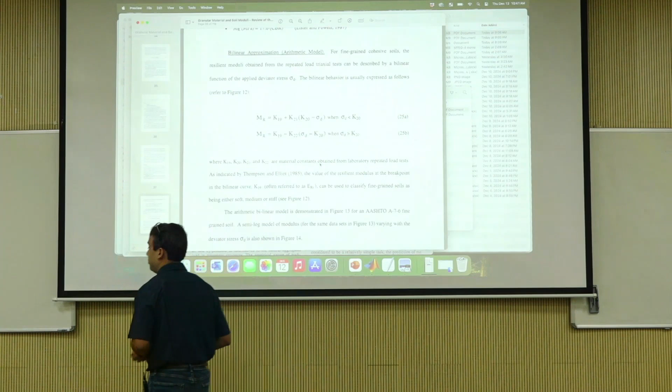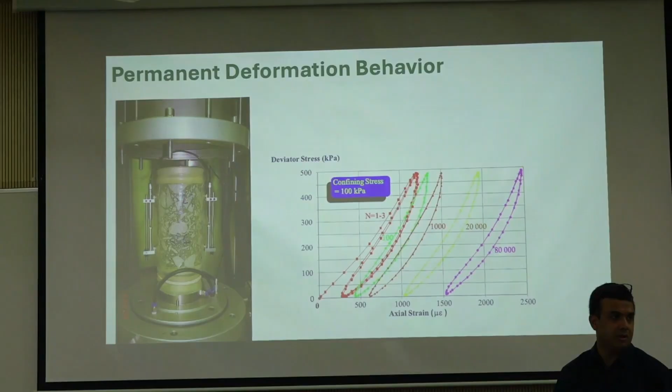Okay, let's now go into part 2 of resilient behavior or repeated loading behavior, which is permanent deformation. We talked about resilient modulus. Resilient modulus is an important input for your MEPDG, mechanistic empirical design and stuff. Repeated loading behavior is more about performance, right? It's not an input, we don't need it as a model input to run this or anything, but it is a very important component because it actually governs your rutting behavior, and rutting is a major distress that you have to address.

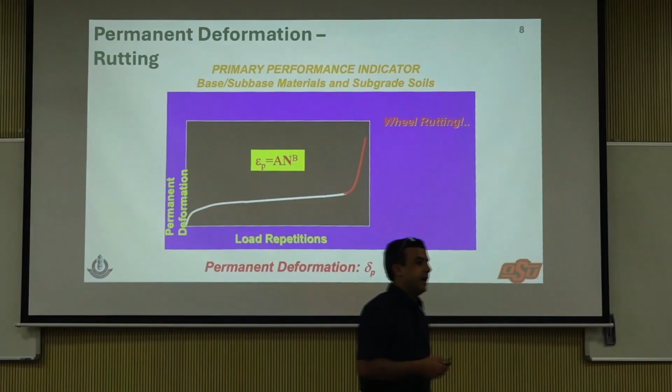It is an indicator of how much loading, or what level of stress the material can exert, and how that affects the fabric of it. It's not really fatigue, but you can think of it similar to fatigue, because even if you are not near failure stresses, if you just have many load applications, at one point the fabric of the aggregate matrix or the unbound matrix can collapse. Look at this curve, you have load repetitions on the x-axis, permanent deformation on the other, and it stays stable. After some time it just collapsed.

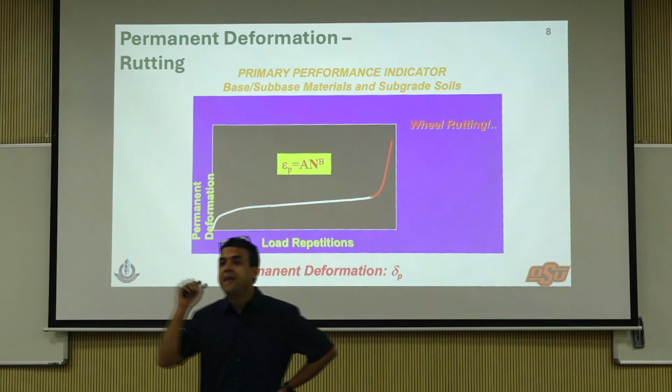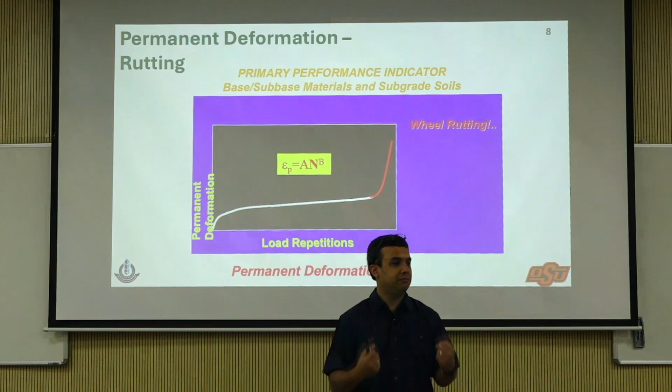There are many factors that affect it. One is where you stand with respect to the failure stress of the material, the shear strength, right? The way I explain it: let's say you are into weightlifting, and your capacity is, I don't know, 100 kgs to lift. You can probably do 50 repetitions, not near your capacity at all. But if you are lifting 80 kgs, then even after say 20 repetitions, you'll probably get very tired, right?

So the nearer to the failure stress you are, the lower the number of repetitions before you actually start collapsing. That's basically what translates into shakedown theory. I know some of you are studying shakedown theory and stuff, we'll talk about that a little bit. But how do you represent it as a model? We'll take a look at that, and how do you study it.

So as I said, for general resilient modulus testing, okay, I think let's just get there. There is no standardized permanent deformation testing protocol. There is no AASHTO T307 or something for resilient permanent deformation. There have been proposed methods, suggested methods, but it's not standardized. There are many reasons for it.

But in the resilient modulus testing, I said sequence 0, not in the data. In the data, sequence 0 meant something else, but I'm talking about when you define the test procedure. I said it's a 15 sequence test, but before you start it, you do what is known as conditioning. And the conditioning represents the material's initial breakdown or initial stabilization. You can use that data as an indicator of the permanent deformation trend of the material.

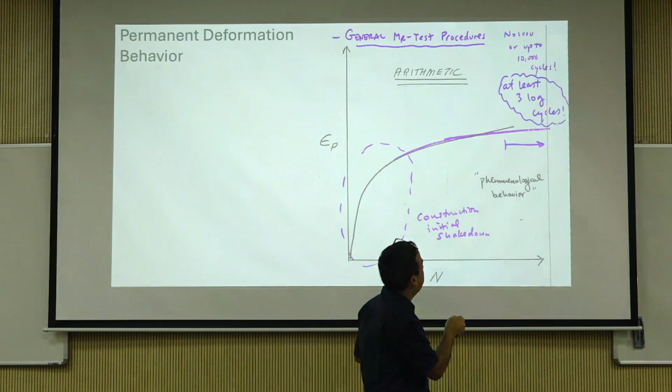Because remember what's happening here. Who can tell me when we are loading, what's happening? This is the hysteretic part, right? We talked about this in the resilient modulus. That's the flat portion, so ideally you should be operating here.

But does that always stay flat? No, it can change because of many factors.

The very standard model that gets fitted into permanent deformation, the most commonly used model, is what is known as a phenomenological model. It's of the formulation A times N to the power B. A and B are constants. N is the number of load repetitions.

At first glance, what is missing from this model? Well, we'll get to that. Modulus is an elastic parameter, right? We don't need that here.

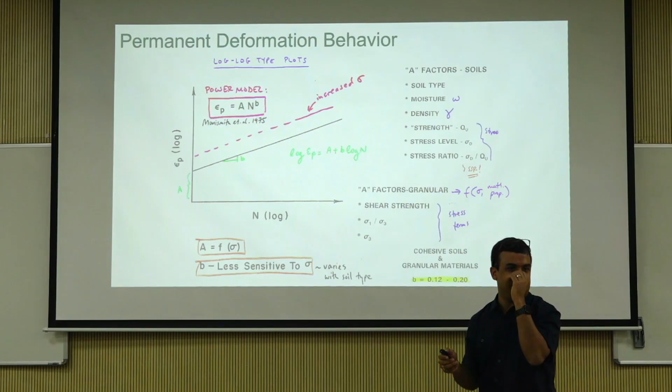Go into the details of this model. Why it has worked over the years is because this A parameter actually is a function of stress state. You are not capturing the stress directly in the equation, but A actually captures the stress effects indirectly. And B is less sensitive to sigma, and it varies with soil type. So A factors in different things like soil type, moisture, density, strength, and stress level.

This is something we are going to hit pretty hard, most likely after the tea break today. It's the concept of, there are two ways to talk about it. First, sometimes people call it the subgrade stress ratio, SSR. It's the same SSR, but it can have two different meanings. We'll talk about this extensively after the tea break.

The whole idea here is sigma D over QU. What is QU? Unconfined compressive strength, right? And sigma D is the deviator stress. How much are you demanding of the material with respect to the ultimate value, the unconfined strength? That's called the subgrade stress ratio.

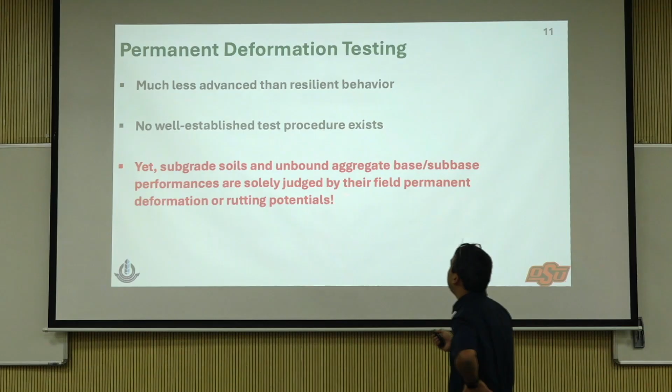Deformation or rutting is basically saying: I will judge health condition by measuring or looking at how your blood sugar is, but I don't give anybody a method to monitor their blood sugar. So that's essentially what you're talking about. We don't have a standardized test method, but every time we do pavement performance prediction, we track rutting and say, oh, it's bad.

But we need to test it then. Not fair, how do you test it?

Again, no standardization - it's repeated loading. That much we know, it's still haversine, we have rest periods and stuff. But the number of load cycles can go from 1,000 to 8 million, is what people have seen.

So can somebody do 8 million divided by how many seconds in a day - 86,400 or something? Is it 86,400 or 84,600? 86,400. Can you do that - 8 million divided by 86,400? I just want to see how many days a test takes.

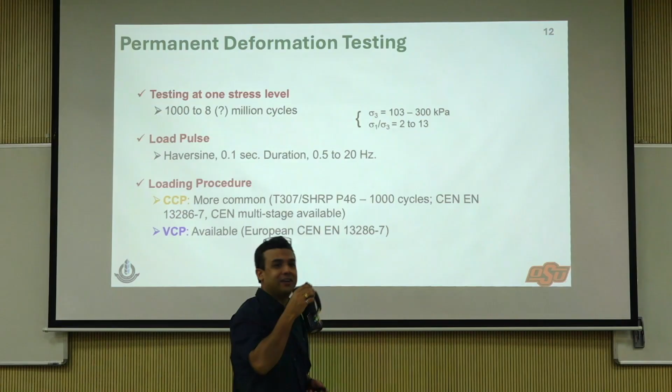So it takes about 3 months, right? Now imagine your advisor asks you to run 50 of these tests, then you're like a lifelong PhD student or something - you never graduate. So it's very difficult to track these long tests and stuff.

How do you do loading? It's more common as CCP. There's actually a VCP procedure in Europe available as well. As I said, for stress states, for cohesive soils, you decide on something called subgrade stress ratio, SSR.

There are some rules of thumb, and I may not have a slide on this, but I'll tell you this. If you're helping an undergraduate student do a little design for a project, and they say, I'm going to put 5 inches of asphalt, 12 inches of aggregate and stuff - is my subgrade going to be okay? You're going to say, okay, what do you have? Like, I don't have anything. I have only CBR. Okay, that's a good starting point.

We don't have anything and we still have to have a result. Let's do a CBR to unconfined compressive strength correlation. That's still okay because both are strength related, so you're still doing okay. So you determine QU and then you run a simple IIT PAVE or something to determine the deviator stress on top of the subgrade, and then you take the ratio.

The rule of thumb is that as long as it is less than 0.6, fine. It's a rule, don't ask me where - it's very empirical in nature. Of course, 1 means what? Say it again. Both are the same - what does that mean? What will happen to your subgrade? It's going to fail, right? You're going to collapse.

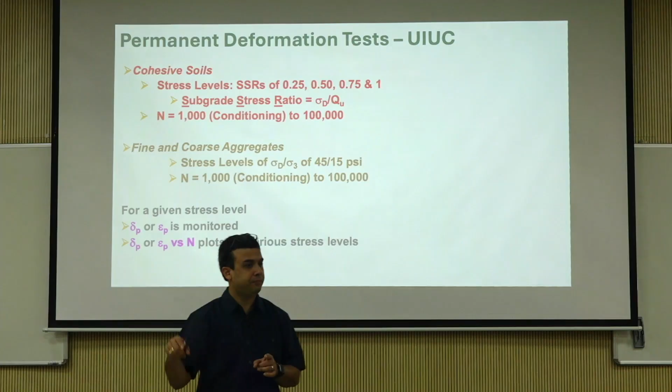So sigma d over QU, the rule of thumb in very elementary design, is limited to below 0.6, 0.7 - you should be fine, you will not have rutting problems and stuff. So for coarse aggregates, you can have sigma d over sigma 3 or sigma 1 over sigma 3, however you want to do it, and then you can monitor the delta p and stuff.

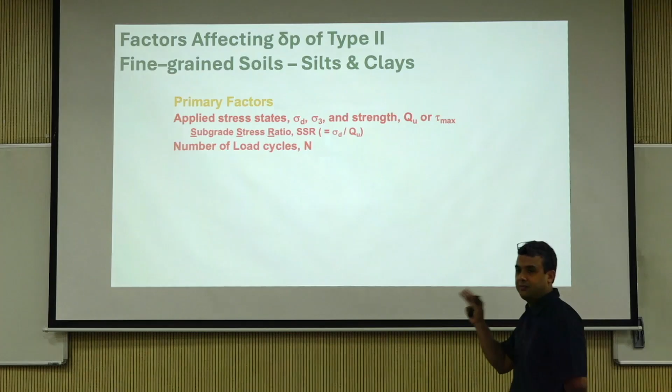What are the primary factors that affect permanent deformation? You can have applied stress states, you can have QU or tau max. Again, we're going to look at the tau concept in very detail after the tea break. And then you take that.

And the secondary factors - you can have moisture content, plasticity index, clay content, dry density, freeze-thaw effects. Now freeze-thaw is something, I don't know, maybe in northern India it's considered really north, maybe I'm assuming, but other parts, no, you don't really freeze.

But freeze-thaw is a major problem because freezing is a very good thing, right? Because ice is very strong, your soil becomes really strong. The problem happens when it's thawed - now it becomes like a mush, right? You can do this test: if you take a little soil cylinder and put it in your freezer, then take it out, put it outside, put it in the freezer again, take it outside, you'll see that the soil fabric actually disintegrates even if you don't do anything about it. The pore volumes and the pore structure and everything collapses. So freeze-thaw is a very big thing.

So let's take a look at some of these. This section is very data based - you'll see I have a lot of test results to showcase some of these things. So you have seen this: this is basically increased sigma increases epsilon p.

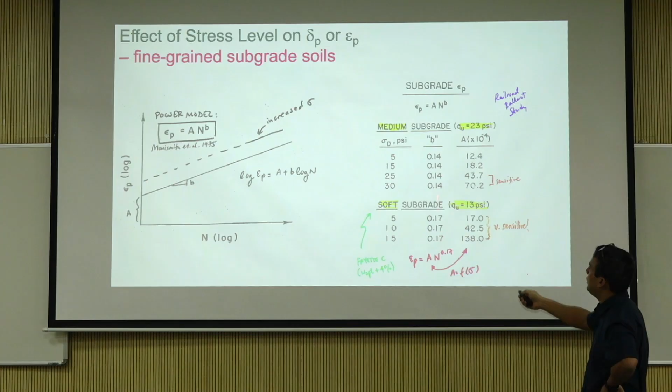These are two different materials: medium subgrade and soft subgrade. Medium subgrade has an unconfined compressive strength of 23, and soft is 13 - two different subgrades. Looking at sigma d, b and a, the b versus sigma d is basically 0.14 to 0.17 for different stress states, so b is not very sensitive to stress in the model a to the power b. The a, on the other hand, can be very sensitive depending on the material and the stress combination. For the good material, relatively good, initially it was just subsensitive and then it became very sensitive at the higher stress states. For the soft material, throughout it became very sensitive.

So let me show you what that represents. If you look at a n to the power b, right?

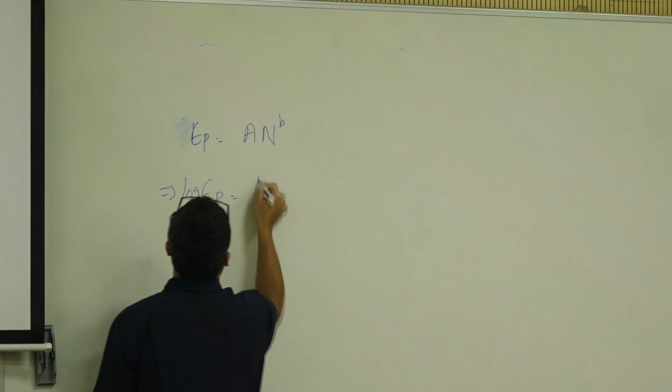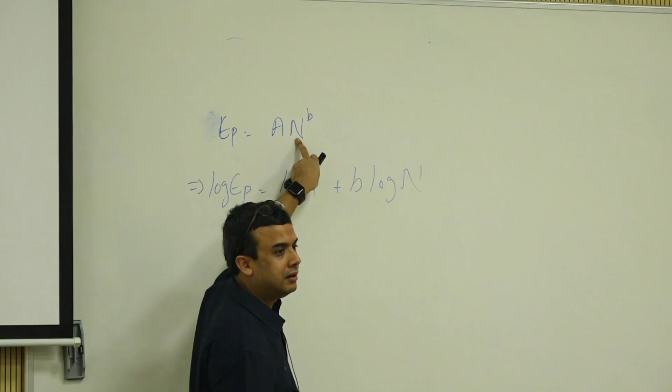Epsilon p equals A times n to the power B. If you take log, log A plus B log n. What is log 1? Zero. So A basically represents... put n equal to 1, 1 raised to the power B is 1, so epsilon P is A. So A is this initial hammering that the material takes, right? That's the intercept, right? So what you are seeing here is as the material gets soft, even for a little stress increase,

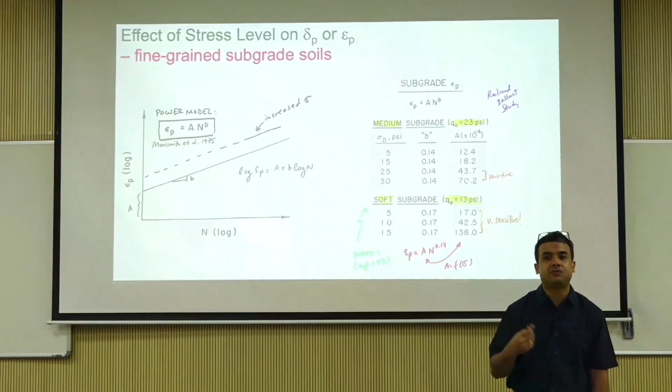Here it's taking a big hammering. Does that make sense? So that's what I want to highlight, is that is not necessarily... man, I broke another one. I'm on a roll. They're going to charge me money now.

What I'm trying to say is, depending on the material and the stress state combination, it can be very different, the effect. This one, this is sigma level, sigma D. Sigma D is 15, 30, 50, and then this is 60. Look, 15 to 50, you did see a little bit of increase in strain, but not something you should be worried about, or panicking about. But look at what happens when you go to 60. So that's what the boundary is.

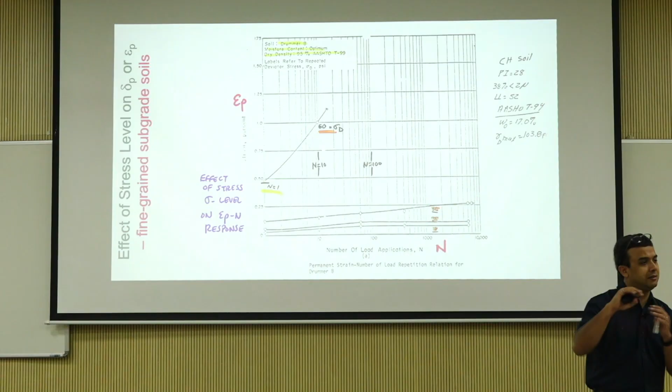You are going to go high with respect to the subgrade stress ratio, and your material is just going to collapse. Remember, resilient modulus is a characterization test where we are intentionally applying stress states that are very, very low compared to shear. Rutting or permanent deformation is something where you are trying to challenge the material to say how... not keeping it very low or something. We are pushing it, right? We are saying, where are you going to collapse?

That's my rutting behavior, right? This again is the same thing. QU, remember I said 50 to 60%, 60, 70% you can be high. In this data, it's about 50% of QU, you are fine. You go to 75%, you go to 100%, it collapses. How repeated loading you're applying and stuff, right? So the whole idea is, it's a pavement.

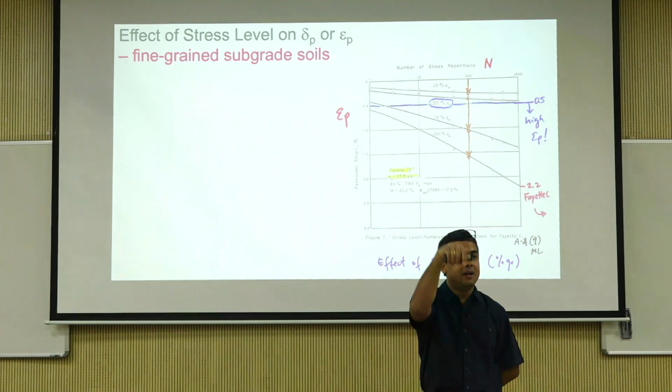That makes sense? So this is a clay material. There is a clay versus silt. The clay has a higher unconfined compressive strength, and how the behavior changes again, 75 to 100, it just collapses. Another data set, I'm just going to skip this one.

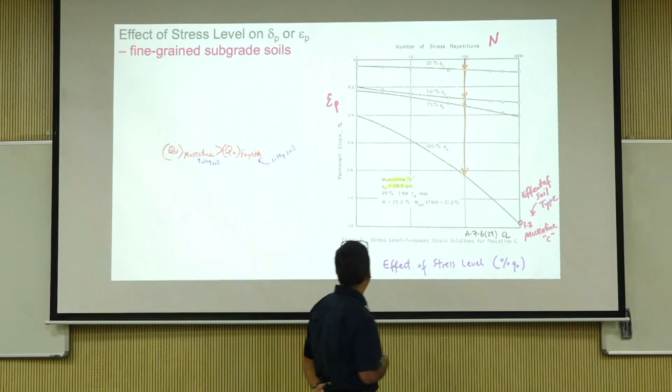This one is again SSR, the same stuff, subgrade stress ratio. 1 means it's equal. Look what happens - collapses with load application. Only less than 60, 70 load applications, it's gone. Material collapses because you are demanding way too much of it. You stay lower, 0.25, 0.5, 0.75, we're okay, we're still at 0.75. The reason we advise not to go beyond 0.75 is it's only 1,000 cycles. If you make it 10,000, you'll see it probably goes very high or even collapses at that point. Here you're in a really safe range.

So designs and stuff, any material being tested, the stress is low. That's the whole concept of protecting the weakest layer, right? Rutting is a good representation of protecting the weakest layer, right? This is, you already saw this. This is sigma d over qu, less than or equal to 0.5, 0.6. This is what I said. You keep it in that range, you'll be fine. And this is C, the cohesive. There's nothing new here.

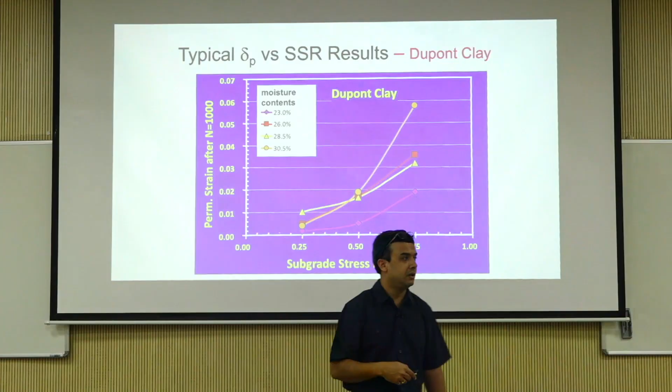Effect of W, again, moisture content. This is optimum. This is optimum plus 3%. This is optimum plus 4%, right? So where do you compact your material? Again, we don't cover this in this course, but you know that in the bell-shaped curve, same density occurs at 2 water contents. Where do you compact? The dry side or on the wet side?

Well, depending on what compaction theory you are going with. If you go by the lubrication theory, you're not talking about flocculation versus dispersion and stuff, you're just talking about strength.

It's more things, right? It's stronger. Can you think of one example or one case? You all should do this. Actually want to compact on the wet side? Why? To reduce the permeability is one reason.

Let's talk pavements. Yes, on the wet side you have reduced permeability because you have more water. Pavements, when do you compact on the wet side? When you have a material that is very sensitive to expansion with higher water contents, like expansive soils.

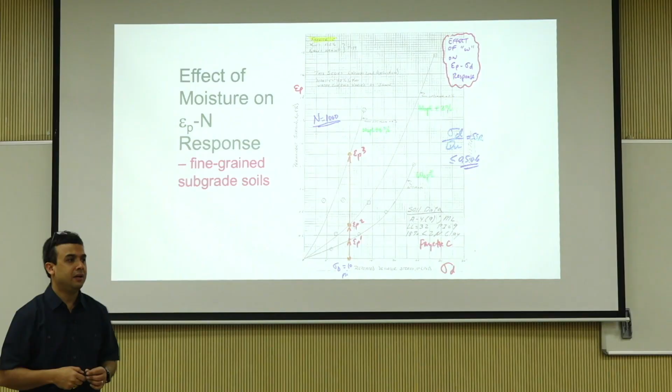It is not uncommon to actually almost flood it or compact it on the wet side, make it expand as much as it wants, take care of all the expansion, and then somehow with a geomembrane or something prevent further moisture changes and build on top of that. You don't really want that situation happening. It's very limited cases, but yes, permeability can also be another case.

Okay, this is again moisture content. At lower moisture content, 23 is good, but beyond at one point, like 26, 28.5, 30.5, it was kind of similar.

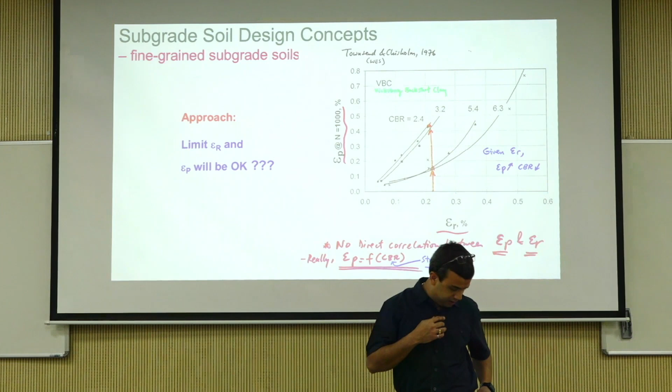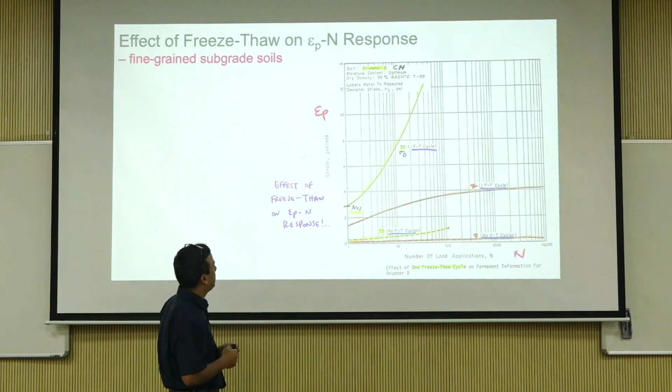Any more? Anything else? Yes. Well, if it's an unbound material and if it shows stress dependent behavior, maybe yes. Now asphalt has some funny properties sometimes, it's very interesting. If you do resilient modulus testing, asphalt will give very good numbers, but if you do rutting testing, asphalt will actually give bad numbers because it lets it collapse a little bit more. So how is it captured? You'll just have to study. I don't think there is any theoretical answer to your question.

Yes, for everything morphological properties affect, right? That's what the angularity index, the surface texture index and everything was for. So yes, if your material changes, like for example slag 1 versus slag 2, or aggregate versus slag, you are not just changing the material, you're also changing the angularity, the surface texture, and stuff. So you have to have some way of normalizing it or trying to balance it out.

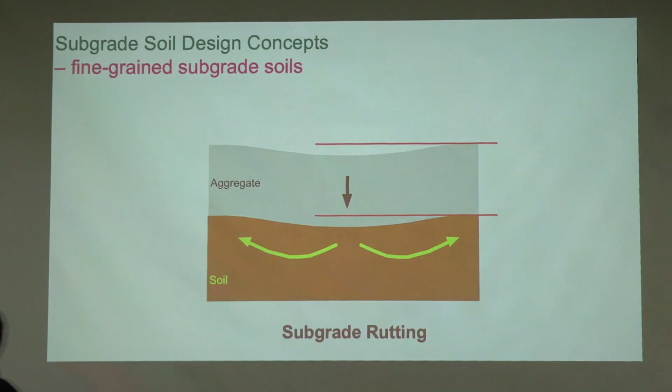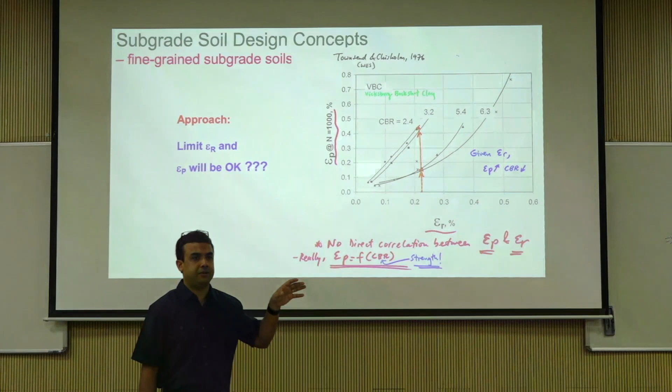This is the stopping point we decided, and the whole concept goes back to the first day when we talked about resilient or elastic strain on top of the subgrade being one of the critical response parameters that predicts rutting. I mentioned that all our pavement analysis programs in practice, and 99% in research, are elastic programs.

So you're talking about elastic strain being predicted and computed on top of the subgrade, and using that to predict rutting, which is a completely plastic phenomenon. This is a test result, where the x-axis is epsilon r, or resilient elastic strain, since resilient response is essentially elastic response. And epsilon p at n equal to 1000 is basically the plastic strain for the same material at n equal to 1000.

If you see here, as the CBR of the material changes for a given elastic strain, you can have multiple plastic strains. Does that make sense? The different lines are for different CBR values of the same material, subjected to the same amount of elastic strain, say 0.22 percent or whatever. As you can see, it intersects all four lines at different values of epsilon p.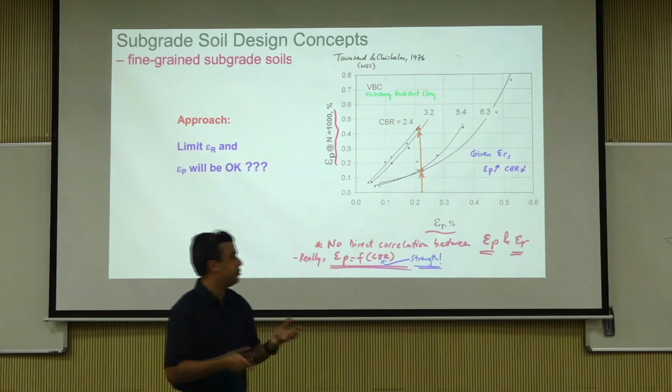That's the reason when you track critical pavement response parameters, track the vertical stress on top of the subgrade, not vertical strain. Capture the stress, then compare that to your unconfined compressive strength, shear strength, whatever. You have CBR, compute unconfined compressive strength, and you can have a ratio - that's what your SSR is. So this is a very important thing.

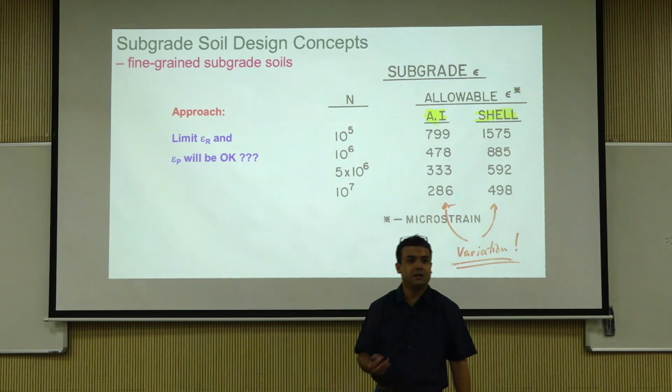Look here: allowable microstrain in the subgrade for AI and Shell - Asphalt Institute and Shell - at n equal to number of ESALs, load applications, running up to 5 million, 10 million, and so on. Allowable strain is 799, Shell says 1575, 478, 885, 286, 498, and so on. Because epsilon R or epsilon P, elastic and plastic, is not a unique relationship - it changes when your subgrade strength changes. That's the reason tracking stress is a lot better, because you can compare it directly with strength.

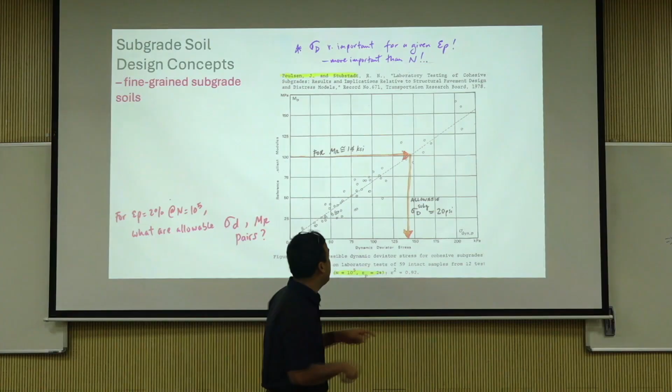That's essentially what the bottom line is. So for epsilon p is 2%, which is this graph, what are allowable sigma d and mr pairs? I am allowing epsilon p is 2% permanent strain, plastic strain. What are my allowable mr and sigma d pairs? If mr is 14,000 psi, your sigma d should be about 20. If mr is 75, your sigma d should be whatever, 100 divided by 6.89 or whatever that comes to be, and stuff like that. So your epsilon p you can limit, then resilient modulus and sigma d, it has to shift based on the resilient modulus. You're actually going to dynamic deviator stress, you're going to stress. That's how you're limiting your numbers.

Now comes the rutting model in MEPDG. This is the scariest looking model that you will see in this short course, and it indeed is very scary, because it has some models, some resilient strains that you get, some epsilon 0, which is a material property. There is vertical strain that you actually calculate using the layered elastic analysis. It came out of Professor Lytton's group back in 1989, and a version of that was adopted into MEPDG. The major difference is in Professor Lytton's model, his model parameters like epsilon naught, beta and rho were only dependent on stress. But in MEPDG, there are other material properties that are included here as well to predict.

The MEPDG model is quite complicated to understand and to implement. Also, if you go into the details, there was a proposal we were working on back in 2014 or something, and I was the postdoc, so I was doing all the work. I went back to Professor Chuck Schwartz, who is now retired from Maryland, and is now teaching in a university. He was actually behind the entire unbound material part of MEPDG. He was in Maryland back then, and he was collaborating with Professor Matt Witczak. So Schwartz was a part of the proposal as well, and he helped me understand how the heck this thing was developed and track it down.

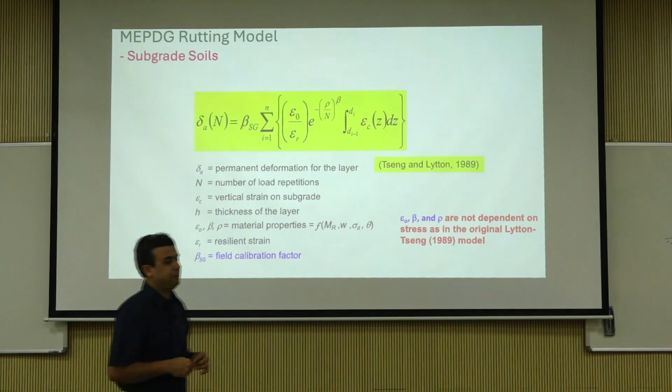Bottom line is, once you go really into that appendix, I think it's GG or something, I don't remember anymore, it's been more than 10 years. When you go into that, you will see that you do all these calculations, and at the end there is an assumption saying that just because we saw in the AASHO road test that 70% of the rutting was coming from the unbound layers, anything that is happening, we are just going to throw a 70% number and call it good. So what I'm trying to say is there is a lot of complex mathematics happening, and then in the background there's a little bit of cheat that happens to go - that's essentially the shift factor. So for all honesty, calibration of this based on your material for MEPDG implementation has pretty much been impossible, and I'm not familiar with anybody who has actually done this entire calibration.

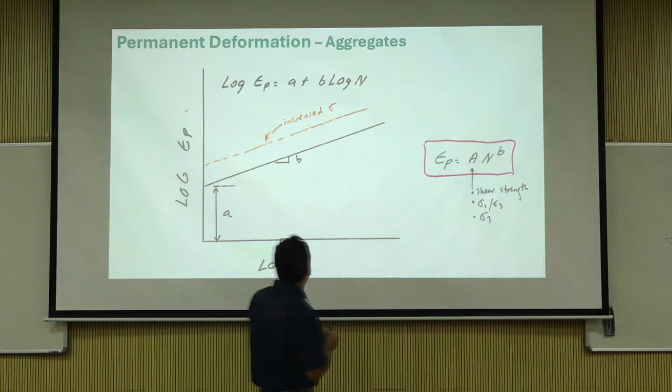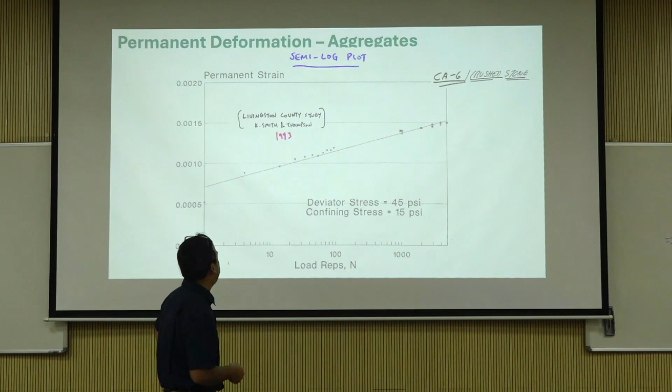So what I'm going to do here is go through a couple of these. By the way, this is aggregates again, A n to the power b, and remember how we focused on SSR, subgrade stress ratio? Here we are focusing on sigma 1 over 3 because there is no qu in here. We'll do that, but what I'm going to show you is another approach - I think I shared that paper with you, if not I'll show you that. We proposed a model about 10 years back which does a much better job, at least in our view.

Couple of things - A n to the power b, what are the factors that are considered? I told you A is related to magnitude of permanent deformation at the first cycle, that's what's written over there. B is the rate of permanent deformation, it's the strain rate. If you do a differentiation over n, you'll see that that's what B is basically. So that's what A and B values indicate.

And there is another model - I don't know how to say his name, I have always said it Khedr, but I don't know if that's the right pronunciation. They also propose something called a strain rate model, so they are predicting absolute strain per every cycle - they are predicting strain rate per every cycle, so d epsilon over dn, rate of accumulation. Obviously it should go down, because when your curve becomes flat, your rate is going down. It starts at a very high value and keeps going down. That's what this rate model is.

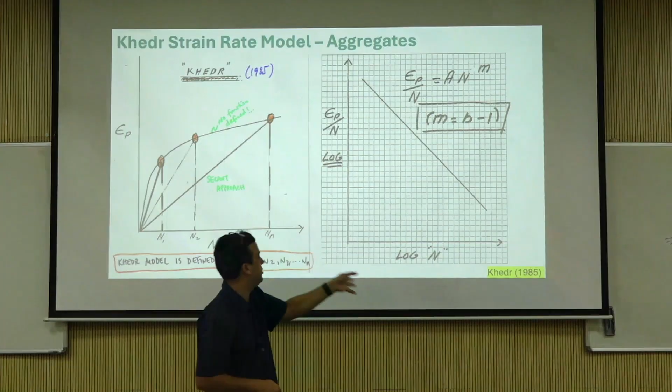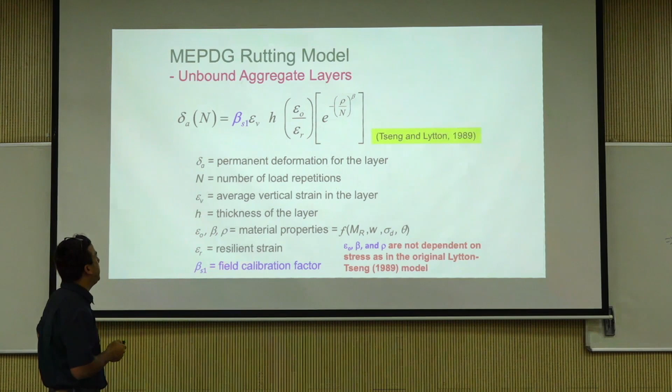Okay, in the AASHO road test, again rutting - this is what I was trying to say: delta AC plus delta granular plus delta sub base, and you can actually calculate the strain rate and stuff like that. This is again for unbound granular materials, how the Tseng and Lytton model and the MEPDG model compare.

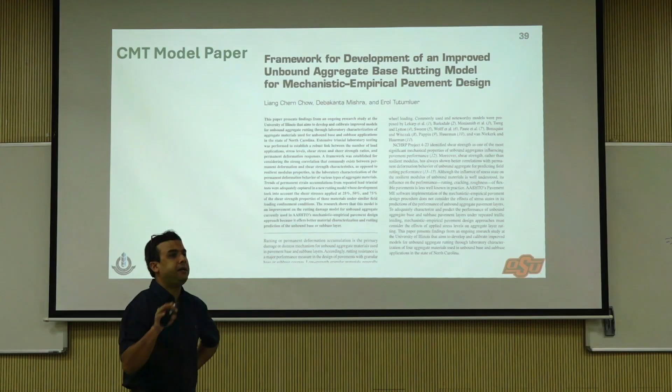So this is what I wanted to go into, checking the adequacy of the MEPDG model. This is a paper we wrote back in 2014, I think, or 15, I don't remember. Liang Chow was a master's student, I was the postdoc at Tutumluer. So we actually developed a model called CMT, Chow Mishra Tutumluer, and we proposed how to study rutting in a better, more representative way than what MEPDG was doing.

So let me show you what this was. 2014 - what we did is we took a standard pavement section and had test results for all the layers: shear strength, permanent deformation, resilient modulus, all materials we had tested. We simulated a 1,000-pound wheel load with 80 psi tire pressure - 80 psi would be about 550, probably 560 close to kPa, right? And MR varied with aggregate type, and we took a mu of 0.4. The subgrade layer we just simplified because we were trying to simulate MEPDG, so we said 2555 CBR to the 0.64. We didn't do stress dependent.

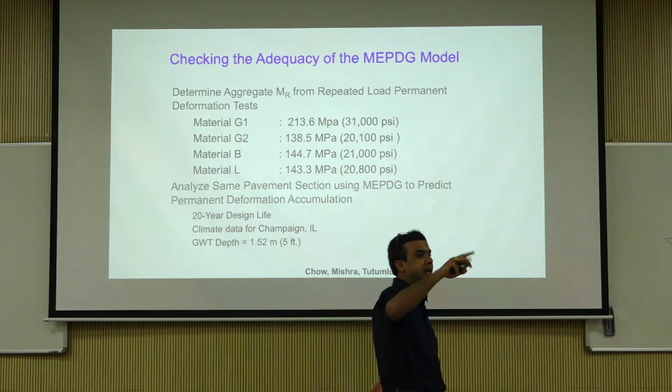And we determined aggregate resilient modulus from repeated load permanent deformation - like when we had a bit of stable behavior, we would take the resilient strain, divide it, and get aggregate modulus. Then we analyzed the same pavement using MEPDG. So we basically put it into MEPDG to analyze what it is doing, and we knew how it was actually performing in the lab.

So the whole idea we saw is material G1 was here, and then all the other three materials were over here at the top - they were kind of merged together. G1 was low, then G2, B and L were all at the top. If you look at it, G1 is 31,000 psi, and this is 21,000, 20,000, 20,000. So the MR values for the three materials are very similar.

We rely on resilient strain to predict permanent deformation. Obviously, if your resilient modulus values are similar, it's going to predict a similar value. Right? That's what we saw.

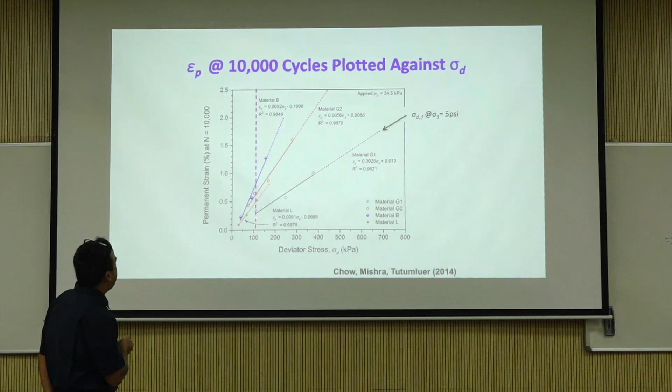But then there is a difference - we plotted against sigma d at 10,000 cycles, and material L was over here, material G2 was over here, material B was over here. So it's very, very different permanent deformation strain patterns - this is actual lab data. So we were like, why is this not being reflected in your MEPDG? If your material is so different - MEPDG is just... resilient does not mean permanent deformation should be similar, because it's elastic versus plastic.

So then this is the model we proposed. We said a n to the power b, and we are going to include sigma d in there, which is deviator stress, and then we said something called tau f over tau max - this is what I was saying we're going to dive deep into in this session. What is tau f over tau max?

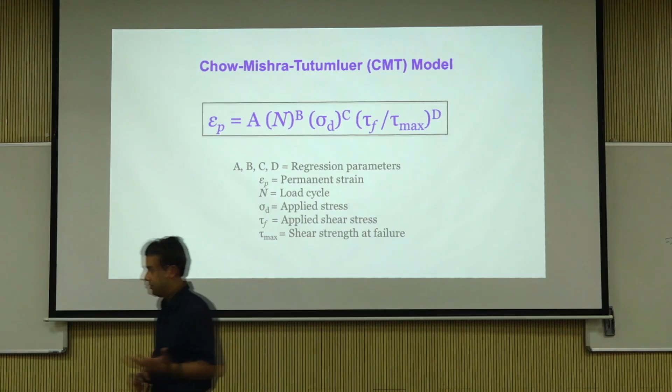Okay, I think the best way would be - I can do it here on the board, I don't need to switch. Look at the Mohr circle. It looks scary, but it's not very scary. You draw the Mohr circle, right? And because you have the shear strength test - what did I say? Rutting is related to shear strength, not resilient modulus, right? Shear strength - if you have shear strength, you can calculate the failure inclination: 45 plus phi over 2, right? So that's what this is, 90 plus phi - in the Mohr circle everything gets doubled, remember? So 45 plus phi over 2 is basically 90 plus phi. So when you plot that, you calculate tau f and tau max.

So let's try to decode this. What is tau f and what is tau max? Tau f is the shear stress on the failure plane, right? Tau max is the shear strength of that failure plane. When tau f equals tau max, what has happened? Failure has happened, right? So do you see how it is similar to sigma d over qu? It's a very similar concept - instead of doing a normal stress sigma d over qu, I'm going to take the failure plane, measure its shear, and compare it to the coordinate of the Mohr-Coulomb failure envelope. That's my shear stress ratio, SSR. Remember I said today SSR can mean two things: subgrade stress ratio or shear stress ratio. So this is what we did - we said it's a shear stress ratio, and we incorporated that into the model.

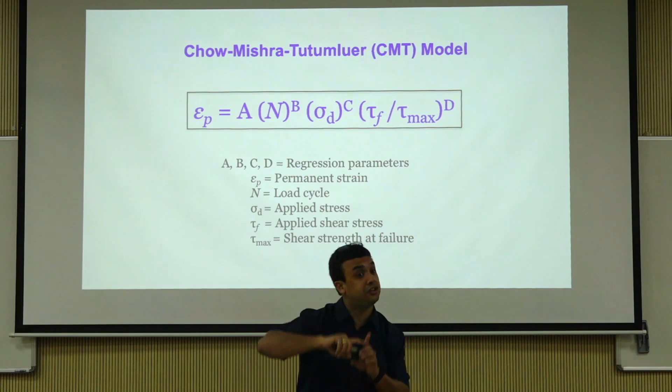We said it's not just a function of the deviator stress, it is also a function of the strength. Just because stress is 100 kg does not mean everybody will collapse - I will collapse, but a bodybuilder probably thinks 100 is nothing for them. So that's the reason we incorporated this parameter into the model. We said we're going to consider not just the stress state, but also the strength. So then we modeled it, okay.

Let's look at the actual performance and the predicted performance for different shear stress ratios. In the repeated load triaxial testing, we knew the strength, and we increased the deviator stress in a targeted way so that we can target different tau f over tau max ratios. We went all the way up to 0.75, which is bad. So you have 0.25, pretty flat, then 0.34, 0.5, 0.75 - it's getting progressively worse.

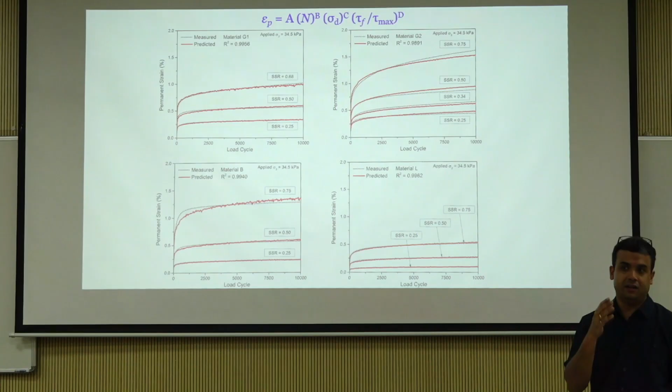This was actually a pretty well received paper and model, where we proposed that we are not going to just rely on the MEPDG model, which relies on resilient strain. We're actually going to focus on stress instead - stress and strength - and then just use the basics of the Mohr circle. So this tau f term is nothing special, you can do it analytically, it's just trigonometry right there.

Then we can look at some field permanent deformation results. This is from the NAPTF, the National Airport Pavement Test Facility, with flexible pavements 5 to 10 inches of AC, CBR 4 to 8, and failed with up to 4-inch ruts. The highest contribution is often in the base layer, which is the P209.

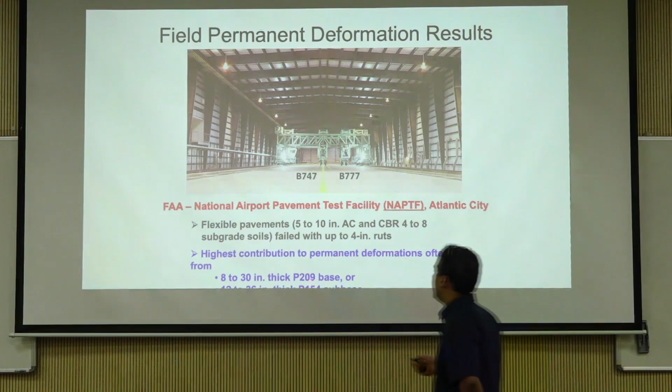At major contribution, at wheel loads of 45,000 to 50,000 pounds, which is typical for aircraft - now we're talking about big aircraft, this is airfield pavement, not highway pavement anymore - you're now talking about the major contribution to permanent strain actually coming from the P209, which is the base, versus when it increased significantly more, then your subgrade was contributing more.

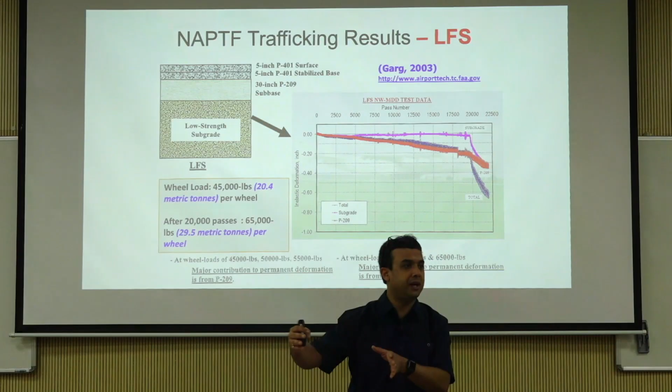So what I'm trying to say is the depth, at what level you are failing, or how much rutting you have - can you isolate your base versus subgrade? At some levels the base will be much higher, at some levels the subgrade will be much higher. So it can change.

Factors affecting delta P: primary factors are sigma D, epsilon, sigma 3, and the ratio of strength and tau max. So we added those, saying what is the maximum shear stress that is applied on the failure plane, the tau over tau max ratio, and the number of load cycles.

Secondary factors: dry density. Now density is a very interesting thing that has helped us escape or cheat for a long time, because density is not a mechanistic input - none of your designs require density. Well, some analyses may require it because they want to calculate - gamma H is the only role that density plays, and surcharge is very small anyway.

But the good news is that in a lot of ways, density correlates with strength and stiffness, because better packing leads to better performance. The problem arises when you have something like railroad ballast or open graded aggregate, where density just cannot be established - it's just not possible, there's so much void you cannot stick a nuclear gauge in it. It's full of voids, and that's when you run into challenges on how to do this.

Percent crushed, uncrushed versus crushed stone - this is actually something Dr. Sahu was just mentioning over tea, that some of the material in bases here can be pretty flaky if there's no quality control. That can be very challenging, because with flaky or elongated material, the main problem is they're going to break. So whatever density you tested or measured has now changed because the material has changed - your packing has changed, your orientation has changed, and now you can have really big problems.

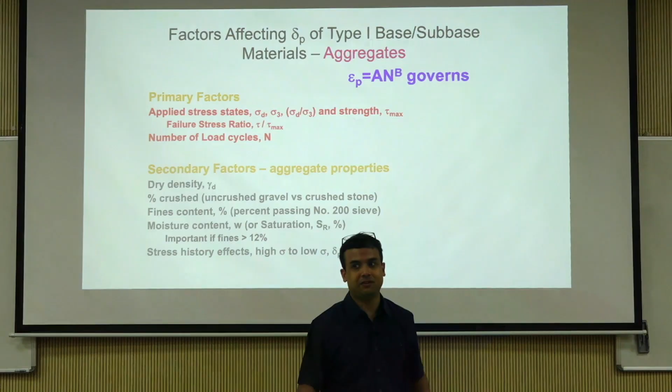Stress history is exactly the same. If you build up stress history slowly, then aggregates will actually resist quite good. If you go from the top to the bottom, it just falls apart, right? So it's the packing that is very important. I think we talked about this already, the tau f over tau max.

Again, you're asking about the ratio, 0.6, a magic number. Keep that below that, and you'll be fine with rutting. Anybody doing triaxial tests in your labs, you can try this out. You can just set this formula up, calculate, do a shear strength test.

By the way, so many people doing resilient modulus tests. How many of you have actually done shear strength tests on aggregates? That's not good news, you need to run that. Shear strength, first thing, it's very difficult, I understand. Resilient modulus is easy to play with, with stresses and stuff. Shear strength is difficult.

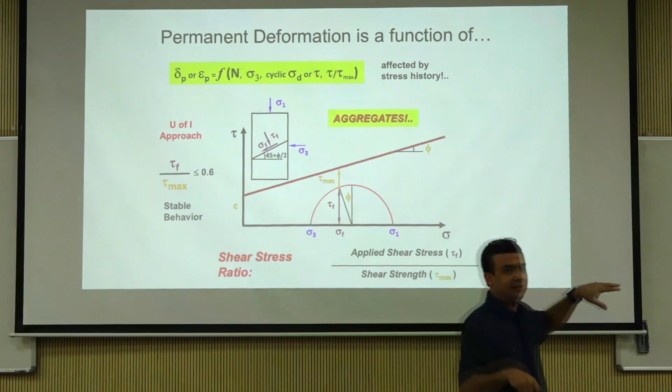But the strength, actually, and when I launch ILLI-PAVE today, you will see why strength is important. You can actually cut off the stress distribution. It's beautiful how Professor Thompson imagined this. The way the software works is at any node, if the stress actually exceeds the strength, he actually collapses that and redistributes, saying that this element does not exist anymore. It's not going to take any stress because the stress is more than the strength. So he redistributes the entire thing. It's beautifully imagined, I don't know how to do it mathematically.

CCP tests, 9 psi, 15 psi, 21 psi, 27 psi. At confining pressure 3, sigma d over sigma 3 of 9, sigma d over sigma 3 of 3. As the deviator stress increases with number of load applications, the permanent strain increases. This is confining pressure effect.

Okay, axial permanent strain, let's just say 0.6. When sigma 3 is 3, you are only taking 25 psi. When sigma 3 is 8, you are taking 45 psi. When sigma 3 is 10, you are never hitting this. That makes sense? What does that mean?

The tighter you hold... you look confused. This is, pick an axial strain, let's just say 0.4. For sigma 3 equal to 3 psi, at 15 psi deviator, you are hitting 0.4. At 5 psi, you are hitting it at about 20. At 8 psi, you are hitting it at about 35. At 10 psi, this is kind of higher than that. I don't know how that works. But you never even get there.

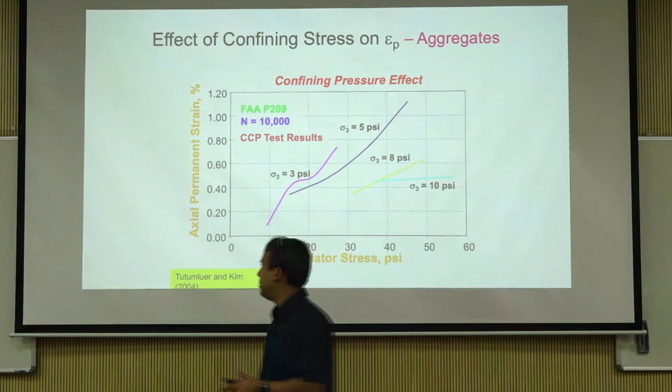This is sigma 1 over sigma 3. Again, tau f over tau max is a little bit of an advanced way of looking at it than sigma 1 over sigma 3. Similar stuff, right? We're not talking about shear or shear plane now, we're just talking about principal stress ratio, sigma 1 over sigma 3. Here, look, 30 over 15, 20 over 5, 30 over 5. This is sigma 1 over sigma 3 is equal to 7. This is sigma 1 over sigma 3 is equal to 5.

No, sigma d over sigma 3 is 4, but sigma 1 is 5 - that's the ratio. So this is essentially saying you have very high confining stresses here, and then the ratios, as you keep changing, it can change how much stress you are able to withstand based on the material.

This is sigma 3 is 10 psi. This is actually Dick Barksdale, my advisor's advisor, my academic grandfather, from 1972. My academic grandfather's grandfather or somebody like that is actually Terzaghi. I actually have a lineage, academic lineage tracked over it. Soil, you know Terzaghi, right? The father of soil mechanics. So yeah, I come from royalty.

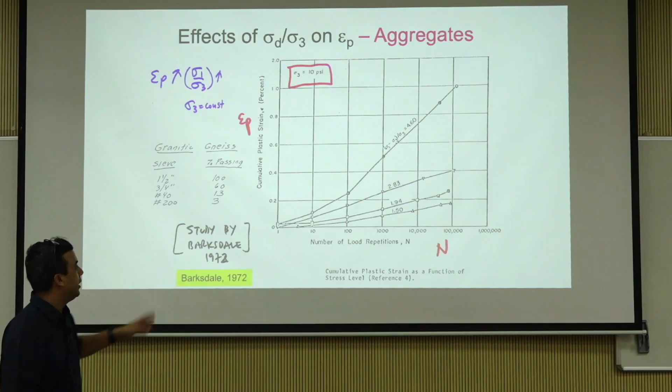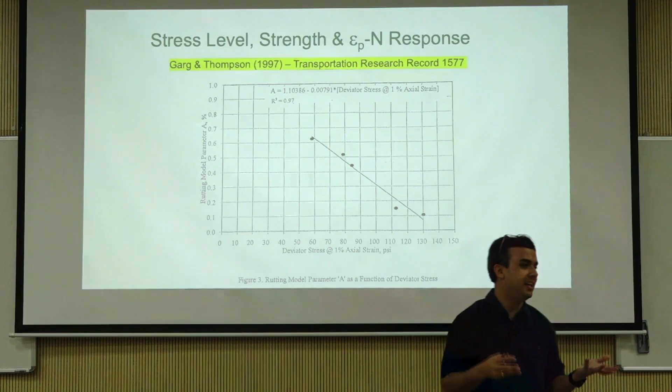And then you can actually do rutting model parameter A as a function of deviator stress. Remember, one of the major criticisms of the phenomenological model is that it does not take into account stress. But the defenders of that, or who believe in simplification, say look, if I apply deviator stress and plot A, I get a 0.97 correlation. So A is actually directly affected by stress - so even if you don't have it in the formula, it is indirectly in there, right? It's not the end of the world.

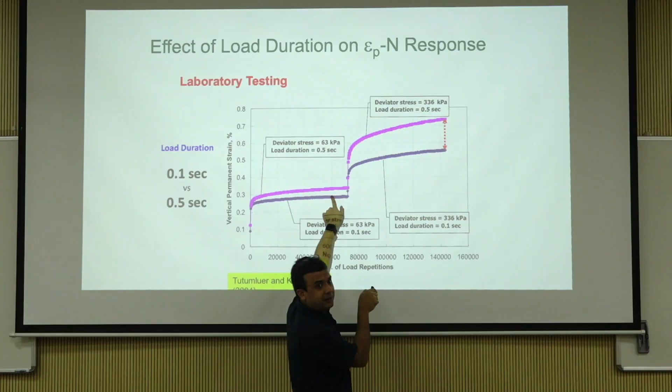No, but here the level has changed - this is not repetition. What he's referring to is this lady called Sabine Werkmeister. She was from Germany, and she did pioneering work on shakedown theory of aggregates. That's what he's referring to about her ranges - she defines range A, range B, and range C of behavior. But I think what you are confusing is, your statement would be true only if the variable here would have been n. Here the sigma has changed as well. You are talking about just based on n changing, and that happens too - remember, not everything that looks like fatigue is fatigue related. Even if the load level is not changing, just repetition can sometimes collapse your material. You can just go.

This is something called the University of Illinois Aggregate Image Analyzer that my advisor had built. He's now built an enhanced version called E-UIAIA. Bottom line, it's a set of cameras, three different views, taking pictures. It's actually a treadmill that runs very slowly, aggregates pass on it, the cameras keep capturing, and the LabVIEW code calculates the AI, the angularity index.

These days you can do this in maybe 15 days what people did as their whole dissertation, because image analysis is becoming very easy now.

One of my students, a master's student, I was so proud of her. She was doing discrete element modeling, which happens to be another one of my areas - we're not going to go into that. I told her I want you to capture this unbound aggregate shape and import it into DEM.

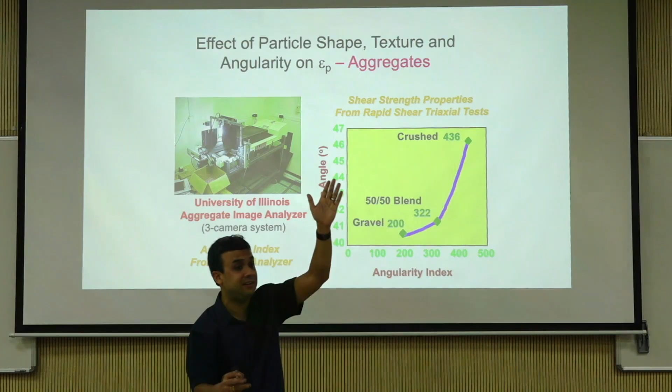And if friction angle increases, what are you increasing? Your tau max is increasing. So for the same stress state, tau f over tau max is now very, very low, so you're completely stable. Hence the importance of quality control, hence the importance of at least this many crushed edges and stuff. It's not just garbage - it increases strength significantly. You need to remember that.

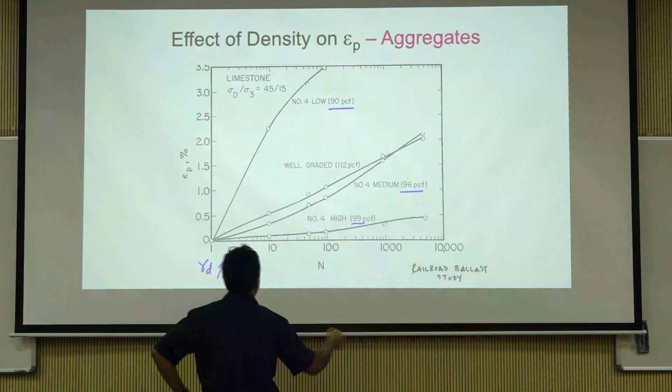Effect of density - it depends on what kind of material you have. If you have 90 PCF, 96 PCF, 99 PCF, number 4 stands for AREMA number 4 gradation, not ASTM - this is railroad. So it's a relatively open graded material.

If you densify it, if you pack it better, your permanent deformation becomes very good - hence the importance of compaction. Again, remember railroads and pavements are very similar.

I don't know how many of you have seen railroad construction track. Do you know what a track stabilizer is? Has anybody heard of it? You know what a roller is, right, a compactor, like a steel drum roller - you've seen that very, very often. A steel drum roller is used on pavements all the time. On railroads there is nothing called a steel drum roller.

You're building a track, and ballast is actually not really compacted. So what they use is something called a DTS, dynamic track stabilizer. It's a train - railroad tracks are constructed using trains. Trains actually construct themselves, so all the track vehicles are trains, not coming from the side. They lay something, lift themselves up, put it in - it's fancy, cooler than heck if you want to see it.

So DTS is a train, basically like a vibratory compactor kind of train that vibrates the track and stabilizes it. It's very difficult to do, especially near a bridge, because you can have resonance and the bridge can collapse if you're not careful. It can work up to a certain point, then at the bridge location they get off, they're like, I'm not going to vibrate this anymore - and that's where all the problems start.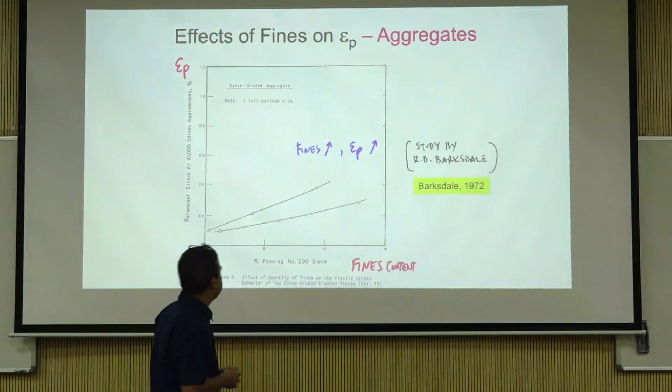So compaction is very, very important. Fines - this is very interesting. If you increase the percent of fines, epsilon p increases, but as I said, the effect is a lot more. This is my work, this is R27-1, this is what I was talking about.

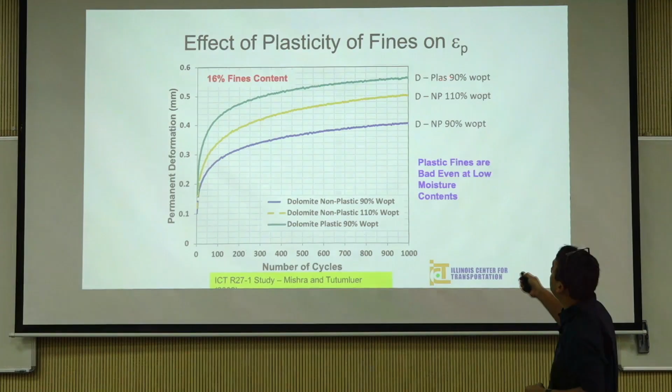This is what I was referring to. This is another one, look, plastic fines, 90% of optimum. It's on the dry side, but plastic on the dry is actually worse than non-plastic on the wet. A lot of times plastic fines are very slippery, very sticky, and stuff.

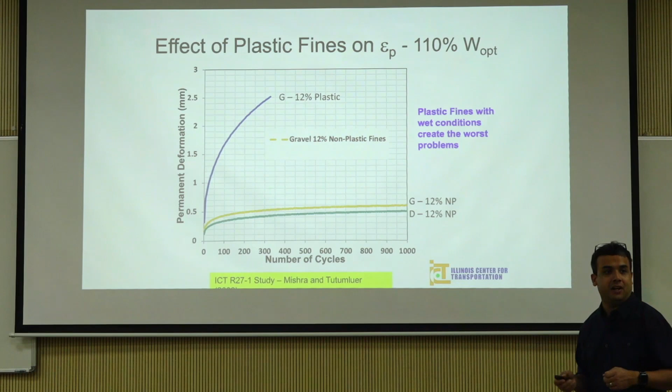So these are all constituted samples, manually blended. Look here, G is gravel, and this gravel is uncrushed material. What is special about uncrushed material? They are kind of spherical. If it is spherical, what is the void space, more or less than crushed materials? How much? What is the most efficient packing you can have among particles? What shape?

So I'm talking material science now, not civil engineering. Well, you never have cubes sitting on each other, right? Is it angular or is it spherical? What minimizes your volume of voids? Spheres, spheres minimize your void. So uncrushed material actually has less void than a crushed angular material.

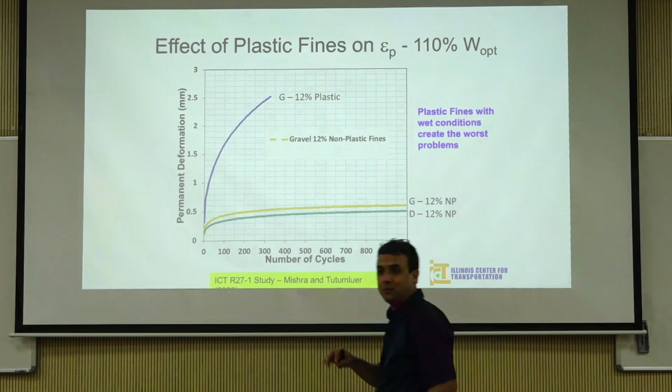So when you have 12% fines in less voids, it's actually more full than 12% fines in greater voids. So the gravel at 12% actually collapsed, whereas the limestone and dolomite, which were crushed, at 12% did not collapse. It's about how full you are, it's all about voids, it's all about void structure.

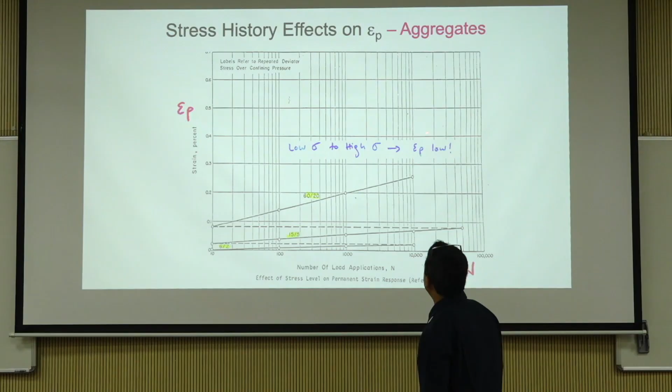That's very important — stress history effects. Low sigma to high sigma, epsilon P is very low, I told you this already. Gradually lift weights, your collapse is going to be much lower. High sigma to low sigma, epsilon P is very high, if you start with a very big one and then reduce.

Now do you realize why in the resilient modulus test in the aggregates it's actually increasing in orders? You're actually trying to systematically apply more and more load.

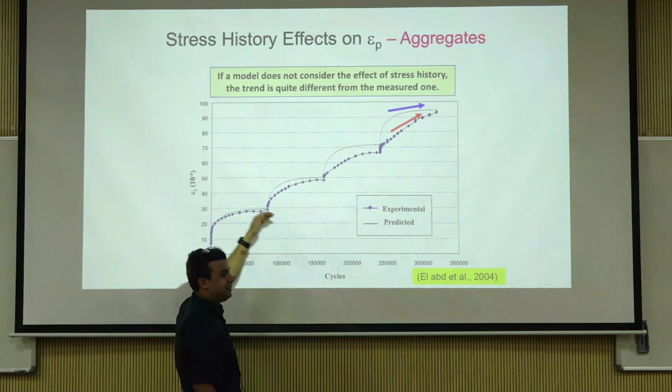If you don't measure, this is important folks. What stage are you trying to model? Are you only trying to model this portion without considering how it got there? So if you're trying to develop a proper model for all different stress states, you have to consider different stress stages.

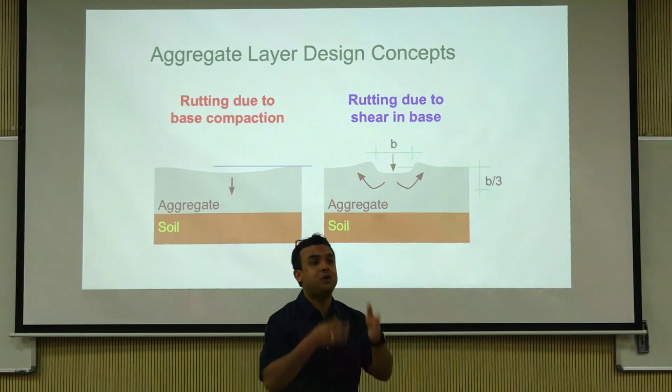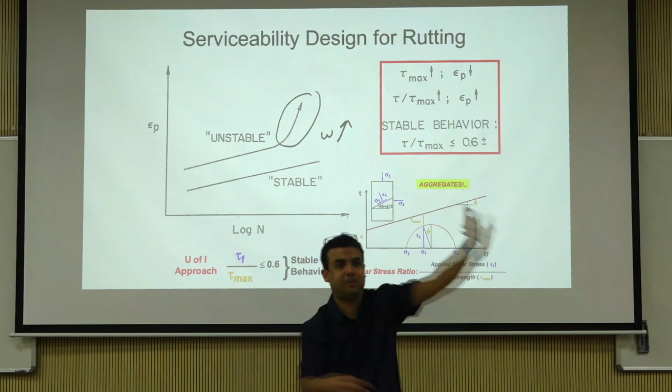Design concepts: rutting due to base compaction and rutting due to shear in base. These are two different things, compaction versus internal shear. Compaction is good — you're just compacting, it just means you didn't compact very well. Shear is different, now your tau over tau max is a problem. So tau max increases, epsilon P decreases; tau over tau max increases, epsilon P increases. I told you this already. When your angular material's strength increases, so your tau max is increasing, so your permanent deformation is very low because you're playing at a lower percentage and stuff like that.

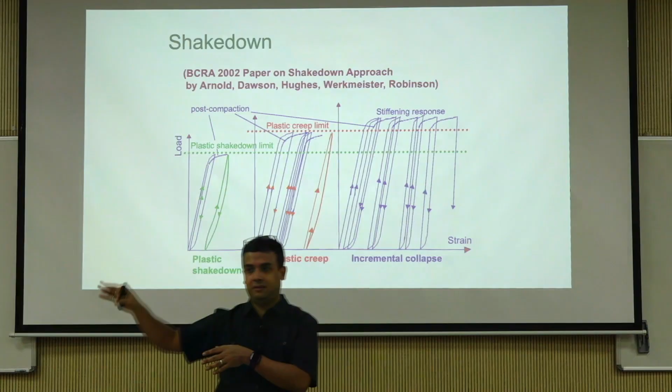Okay, we're not going to go deep into this. This is the BCRA stuff I told you, this is the Sabine Werkmeister work I referred to, this is her dissertation work.

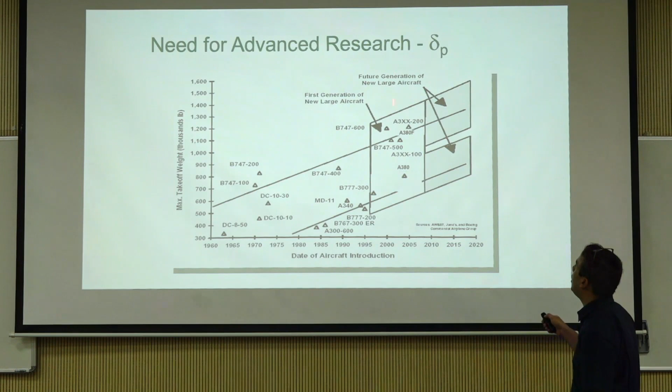Need for advanced research on delta P. You have some data, but beyond that, future larger generation aircrafts and stuff, you don't know what the load is going to be. Why do you need that? Your pavements — you're going to use recycled materials, other kinds of materials — you have to study mechanistic methods to do this.

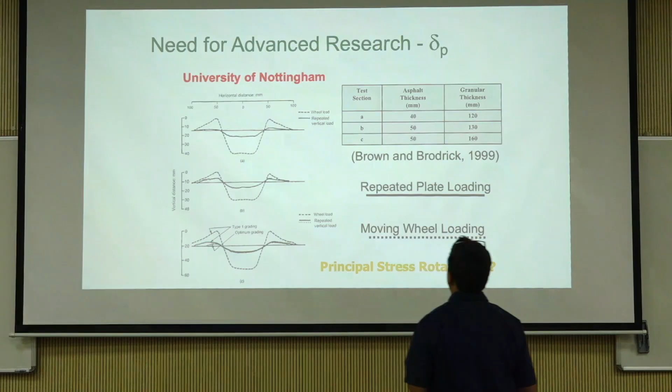Okay, this is some shear concepts, I'm trying to switch. We talked about principal stress rotation. I want to show some stuff related to railroads. Okay, I'm going to switch now to a rail.